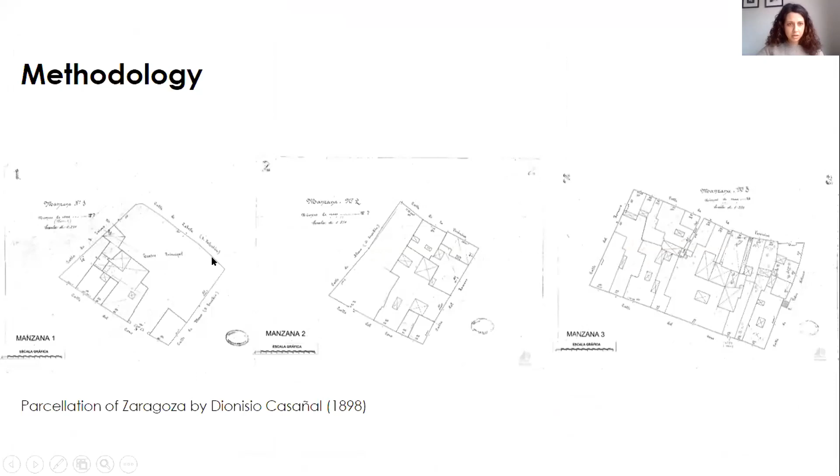So it started by putting the building blocks, and after finishing this area, including the theater, which is on the southern side of Decumanus and the east of Cardo, I placed all of those individual surveys inside of those blocks. In here, I superposed the two surveys, but I don't know why you're not seeing it.

Never mind. So for the analysis, I'm going to talk about the typological process. The term typological process was defined by Caniggia and Maffei to explain the progressive differentiation among building types in the same cultural area. The reason for change in type is progressive variations and adaptations of existing buildings.

The existing building can be a base type, like we have on the left side in this block as a domus, or it can also be a specialized type, such as the ruins of a theater. After losing its significance, it is transformed into a substratum, which is the base for man to transform and adapt it for his living requirements.

While these two examples do not share the same exact formation, they are both acting as the substratum. And here we have a row house as the substratum type.

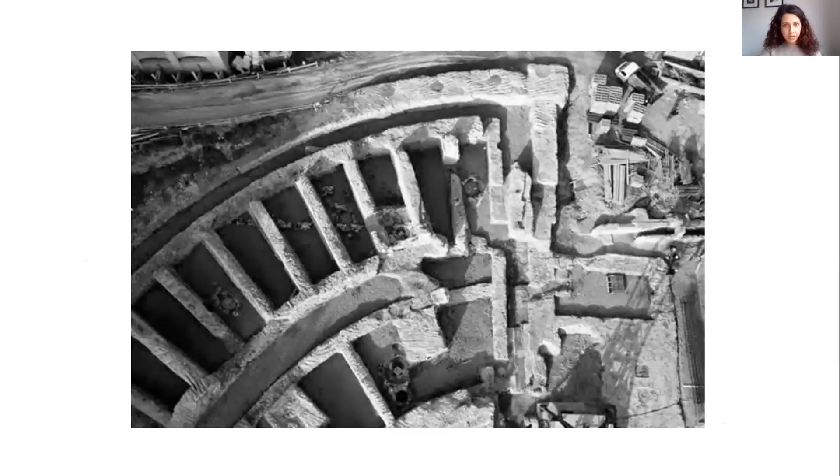Since we know that the theater was actually in this place, I superposed the two surveys to see the change in this block over time. Here you can see the overlapping walls, and the reconstruction plan of the theater done by Miguel Beltran Lloris.

So here, the typological plan shows the difference in types in the same block: patio houses on the left, and row houses aligned with the theater. But the pseudo row houses that indicate the stages of the block take my attention the most, the yellow ones.

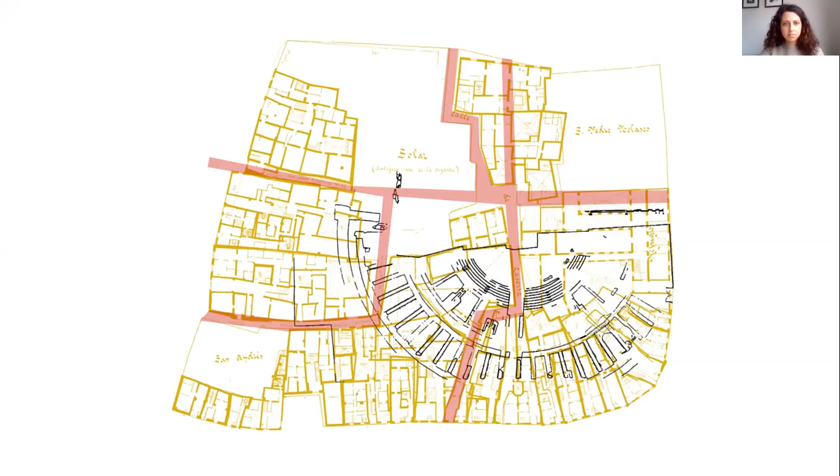First, I prepared the route analysis, then illustrated my thoughts on the formation of the block. Both the pseudo-row houses and the empty area on the left bottom indicate the stages this block has been through over time. So I tried to identify the types to see the measures for the process.

The second type is the row house. They show a wide variety in the block, but they also take shape of the theater and have direct access to their backyards, which is the former orchestra of the theater.

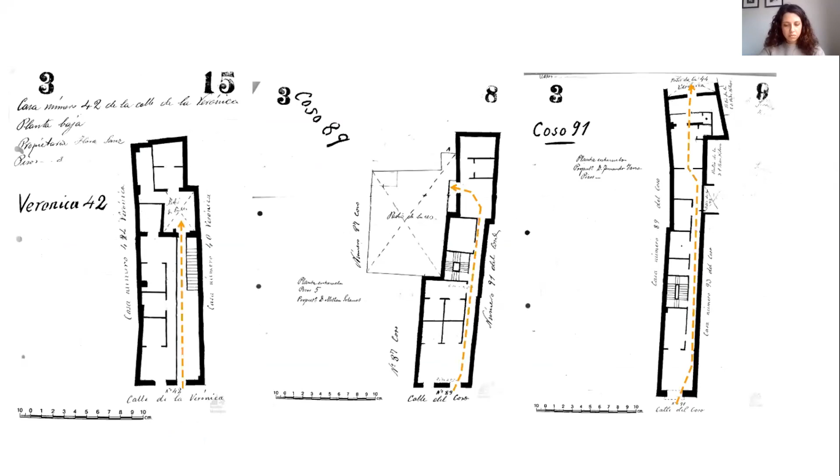And the last type is pseudo-row house. That gives the hint of former roads in the block, and they are usually monocellular in this case.

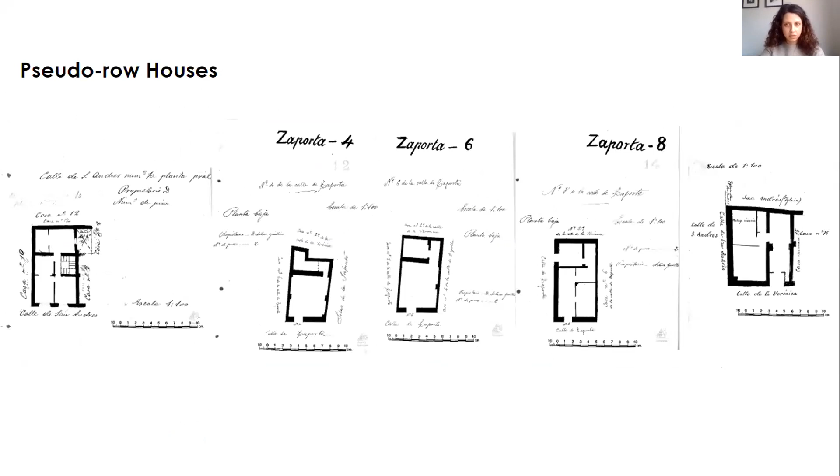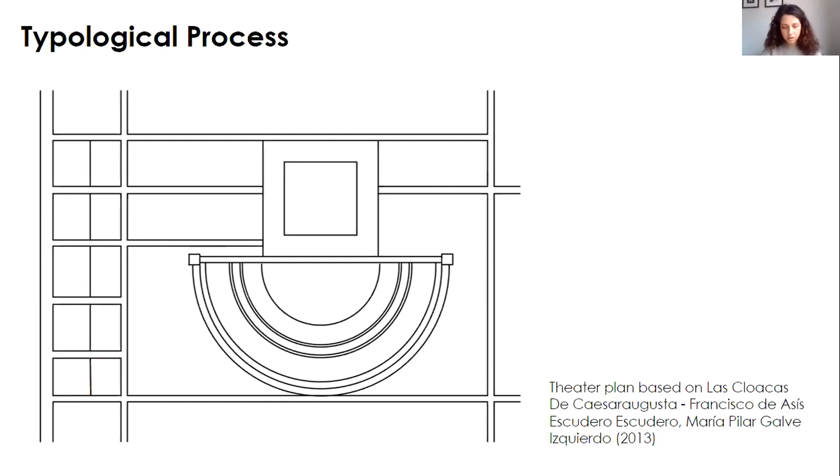So lastly, I prepared the plan of the block in Roman times by using information from other research done on that stage. Most of them were sharing the Cardo, one block away from the theater on the left side, and the domus between these two blocks.

On the next step, I compared it with the plan of Ambroise Tardieu and existing roads. It shows the patio houses take shape on the left side by taking the place of the theater after it turns into ruins. Later, we see the evolution of roads and merging of these two blocks.

The road on the left is directed to the mosque in the north of the city, so this stage might have happened in the Muslim era.

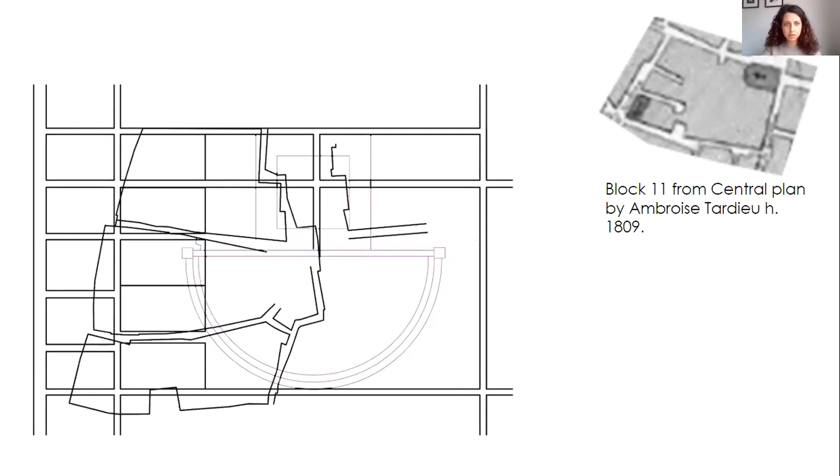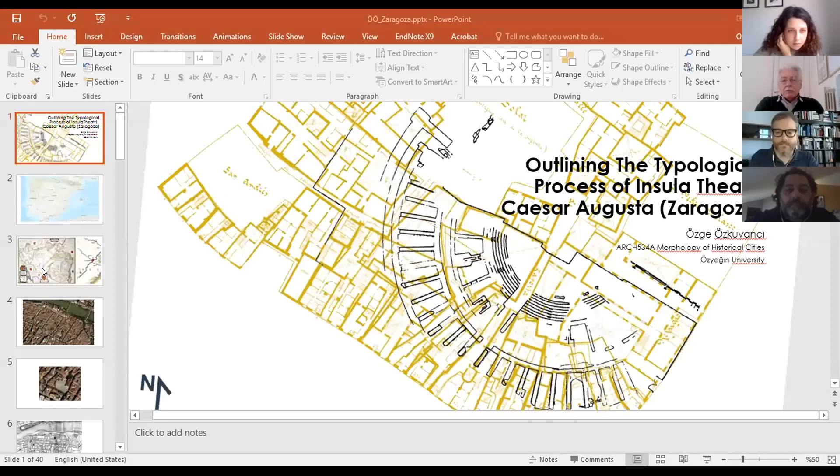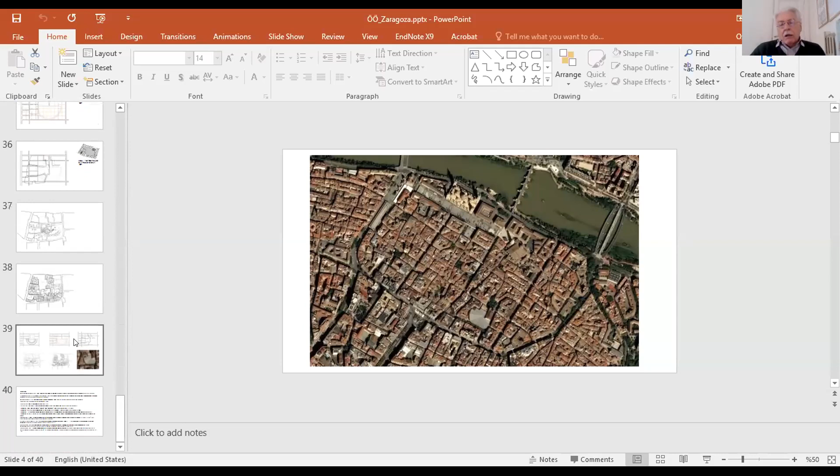In color, it is a final analysis in color that you made at the end, down, down, down, down, down. You have made an analysis with red for the matrix, and light blue for the restructuring. Next one, next slide, next slide. Oh, this one. Okay, go on.

Okay, you see to the right side, you mentioned two. You have noted two restructuring streets. So I was wondering, what are the attractors that made those restructuring streets?

That probably would be outside of the figure, actually. So one of them is for sure the theater on the left, but you have to find out what happens, what is on the other side, what is attracting that route on the other side.

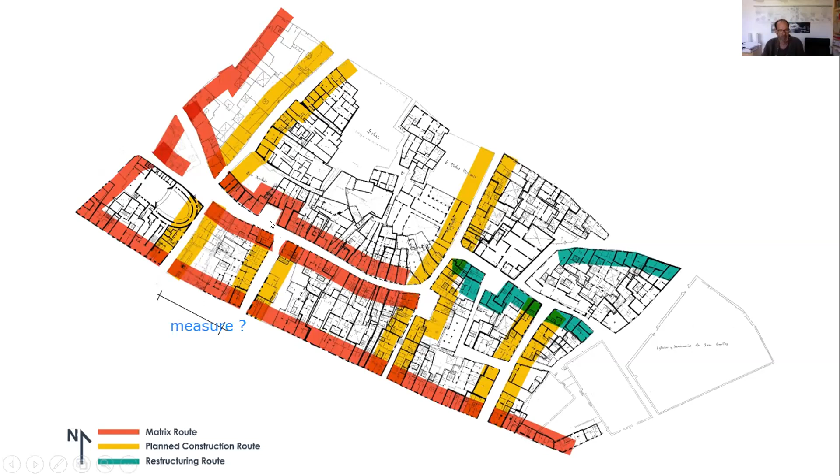Sorry Özge, there was a slide that you showed very briefly showing the terrain, but maybe you want to comment further on that one, one of your slides.

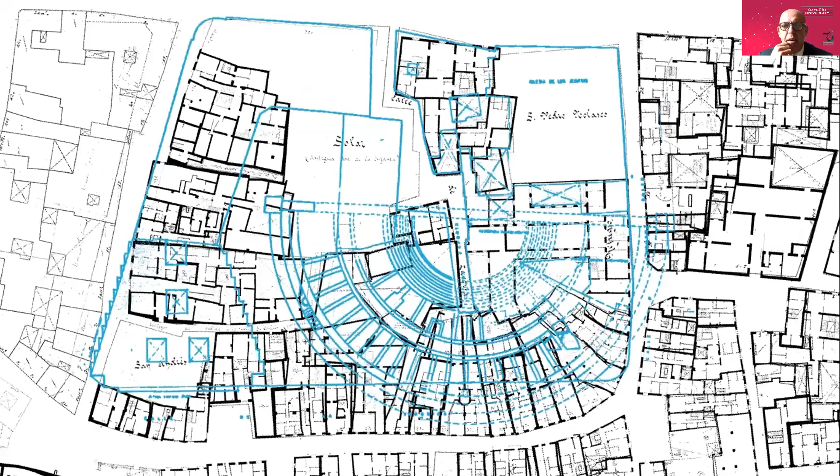I didn't hear the last thing you said, Professor. One of your slides was showing the overlapping of the topography of the terrain with the urban tissue, but you didn't comment. Here, yes, I didn't. Yeah, I can include that information too. Thank you for reminding me, I think I missed this one.

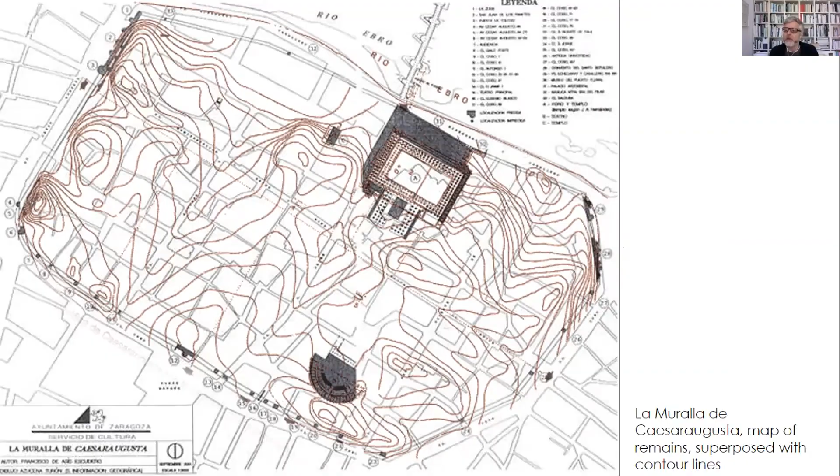Can I ask you another minor thing? What about the actual situation of the neighborhood? Is it abandoned? Is it a livable place? Is it a high-end neighborhood? What about the life in it? Because maybe this could be interesting, just to know how this is working today.

So what's the situation? I have to be in there to answer this question, I think. I mean you haven't been, okay, because during the lockdown this is like a pre-study on this area. I was figuring that this was something that you started before the lockdown. Okay, well I may help you also with this question.

It's a very livable neighborhood. It's not so high end. It used to be, like 30, 40, 50 years ago, a little degraded, but now it's a very nice place to live, and it hasn't fallen into these gentrification processes still. So it's quite a mixture of different people, different economies, and it's a very nice place to live. I live near there, so.

Okay, and what about the usages? Is it residential, commercial, shops? It's mainly residential. It's like the typical city center in Southern Europe, where you can find different shops, small shops, grocery shops, and also there's a commercial street, lots of bars and restaurants as well, but not so many that have expelled the residents. No gentrification, not yet, or well, just maybe a little bit, but not so much. Rents are still affordable, I would say.

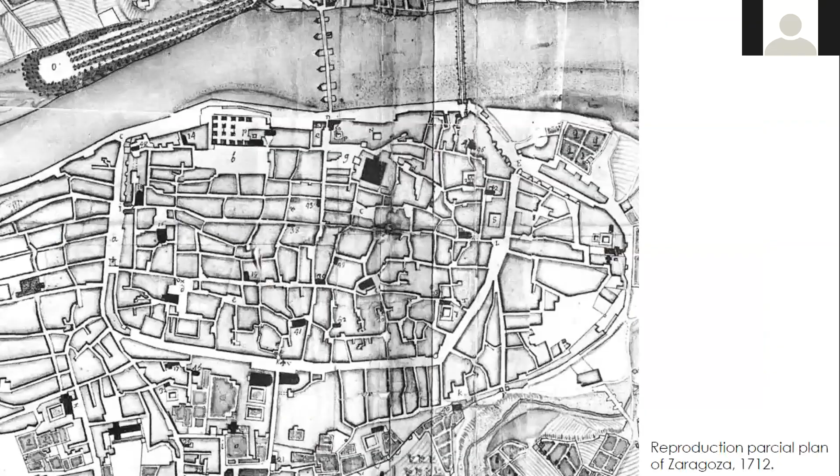And then I also noticed that you have somehow analyzed the prevalent measure of the patio house. There's a slide, can you go back to that slide where you show the measures of the patio houses? No, not this one, not this one, not that. This. So that is interesting, because it should be 17.76 times 35, which is the typical measure of the Roman domus. What is that? It is 60 times 120 feet, Roman feet. So this measure is very much close to that one.

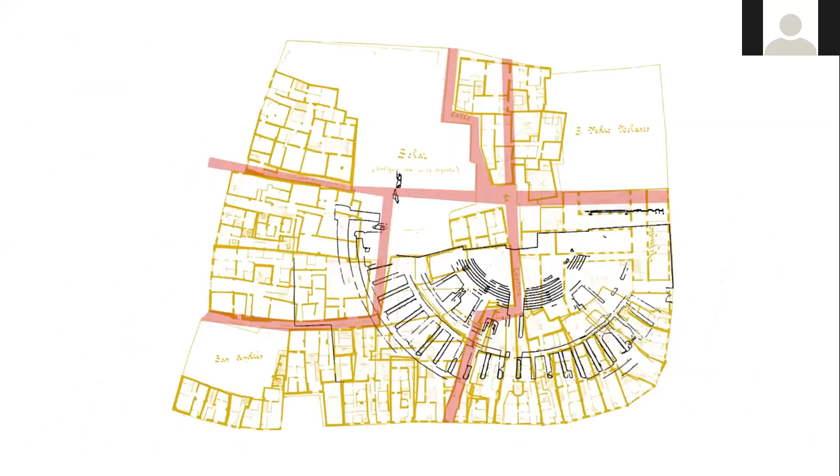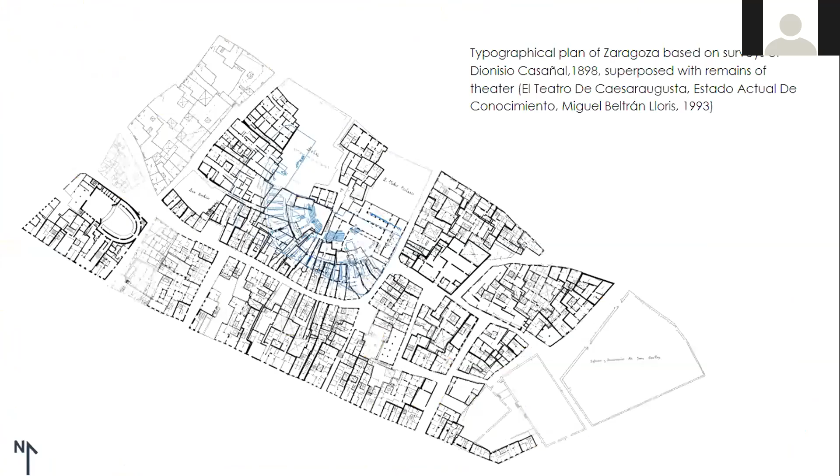And I would look closer into that issue of the measures. And then if we go back to the other slide, with the collage mosaic of the plans. Yes, sorry, no, the one before, the one with the matrix route. Oh, this one could be as well, any plan that, yes, this one. So again, this measure I'm asking, you see here, it seems to me to be 35.50. Is that right? Yeah, almost.

Can you check that measure in your next stage? Because it seems to me that it is 35.50, so that these eventually could have been two domus, 1 and 2. And if this is the case, let me change color to show this. So we have, this is one block, 2 domus. This could have been another block, two blocks with 1 and 2, okay, with 2 domus each. So in this area, you have eventually the persistence of the urban grid, of the Roman urban grid, most probably, not sure, but I'm taking a look at it, and this one also could be another block, 35.50. So 1 block, 2 block, 3, 4, and so on.

So that gives you the hint, and you can attempt a reconstruction of the urban grid starting from the information you gain from this collage you have done here. And that's also very interesting. So also, Professor Petruccioli outlined how these restructuring paths, let me change color here, 1 and 2.

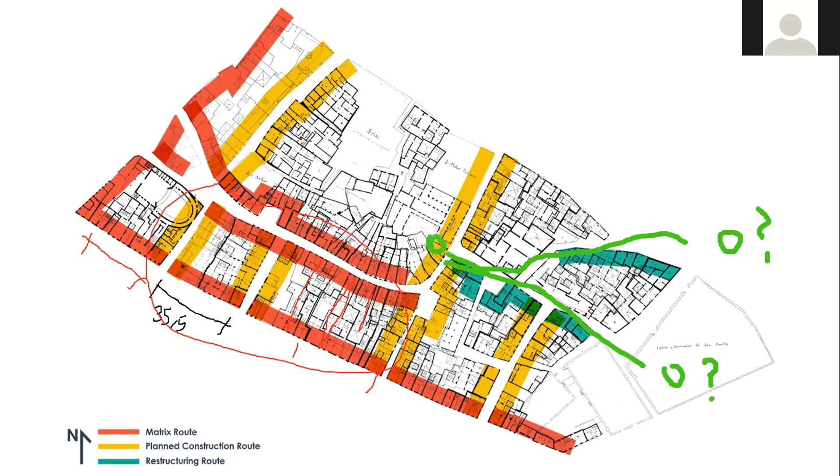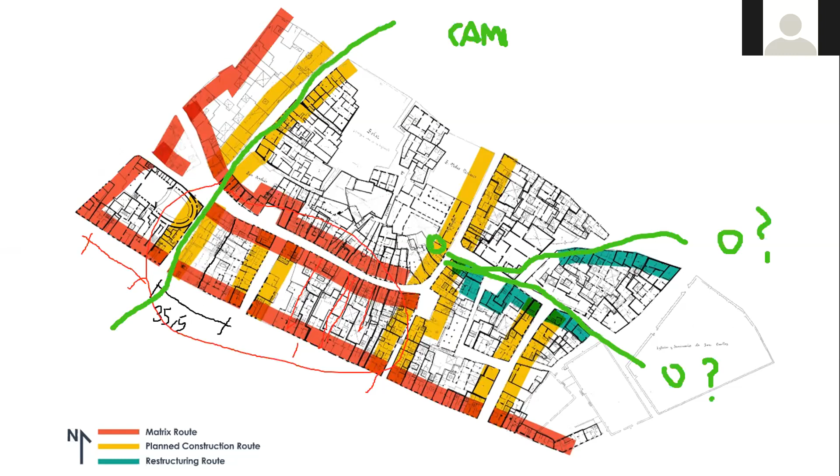That's one of the remarks Petruccioli gave you, which is very interesting. But on the other hand, it seems like this one goes to the mosque, right? Cami, right there, at the end of that path. So again, it seems that the pole determining this other one is not restructuring in terms of the aggregation of these blocks, but in the grid, the urban grid restructuring path. So if that is the one pole, Cami, over there, what was on this other side? That's another interesting question.

And also, even though it's not restructuring in terms of urban tissue, this one looks like another restructuring path. So what was on that other end? In a way, you are looking at the types, the tissues, but also the roads. And how are these roads changing in time? What are the polarities determining those changes? So if you have a Roman phase, you must have an Islamic phase, then a medieval phase, and even a modern phase eventually. That's also something very interesting to look into.

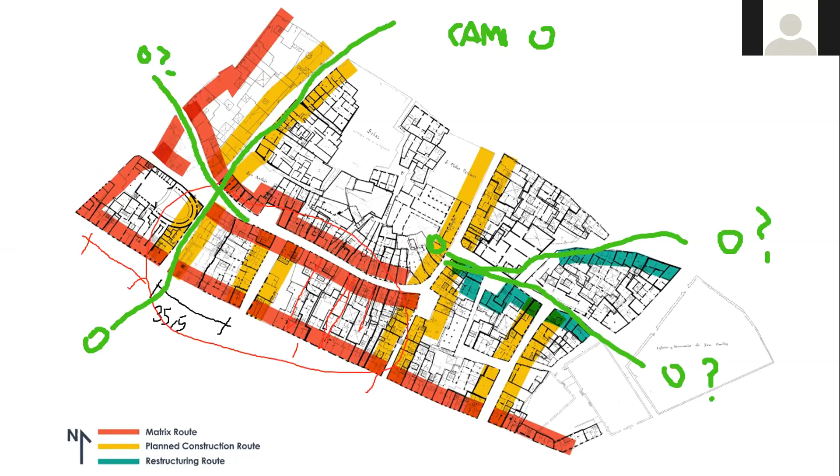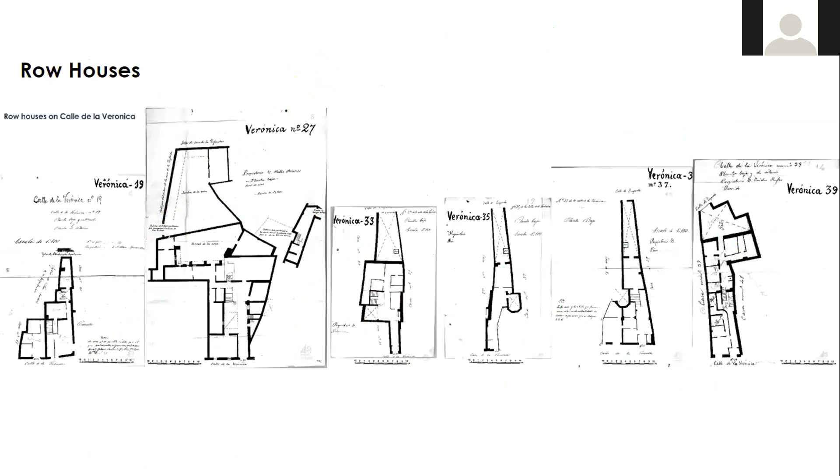I suggest that for the purpose of this paper, you try to draw a matrix of the typological process. Show all those types you've outlined together in a matrix, just like Caniggia did for the row house or the courtyard house. Put them all together and show them with the same measures, but not the individual buildings, the types. It's like a sketch, something like this, but a little more accurate. Show them all together, and try to outline how one moves into the other. Make an attempt at outlining the typological process, which is about how those types change from one to the other.

But congratulations, this is a very good start. I'm very proud of you. Thank you. Thank you.

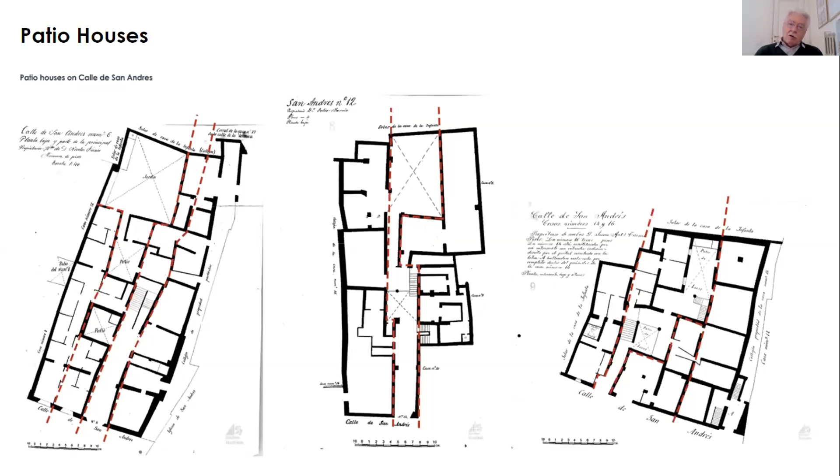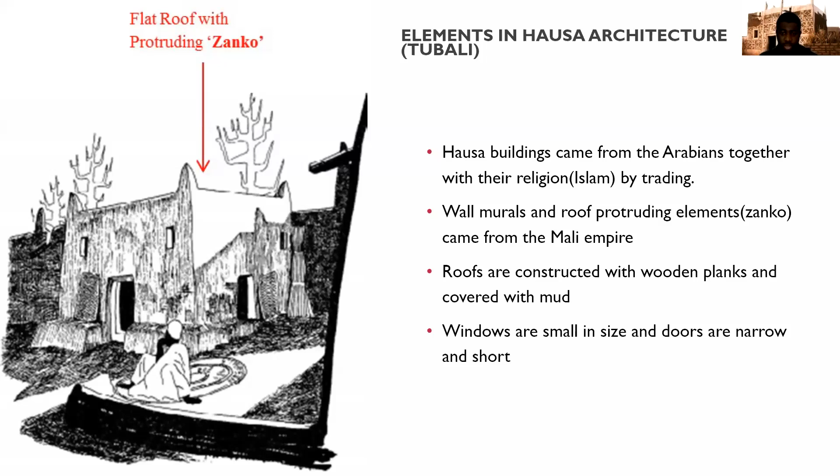I want to talk about the typological process, what makes them, how do they grow from, let's say, a domus house, which is a single house, into a multiple family house, into insulae. So what are the reasons, what are the characteristics these houses go through, the process they go through into developing into a big settlement.

Forms of this type of architecture, the Tubali houses, are mostly courtyard houses, and the courtyards are mostly located in the northeast region of the houses. The houses from domus merge into bigger houses, insulae, the reason being family expansion. The people in this area get married to the people close to them, let's say the surrounding neighbors. So as the houses are developing, they marry into close families. This is definitely the main reason that changes the process of their houses.

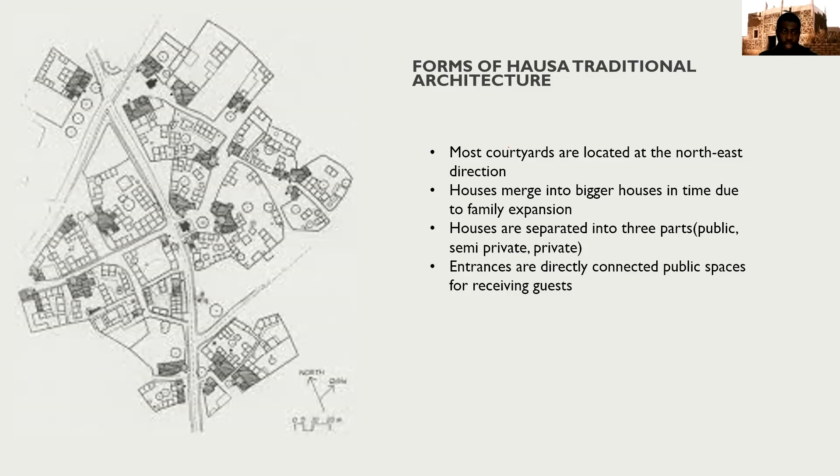I would want to talk about the formation, the type of courtyard house they have. These people's courtyard houses are divided into three main areas. We have the public area, which consists of the entrance and sometimes the places of the male. The male do live in the public or semi-private areas. This is because the culture, the religion, Islam, which was brought to them, makes them segregate between male and female. So the females live in the innermost part of the houses, while the males live in the public and semi-private areas, whereby they accept guests and do their trading.

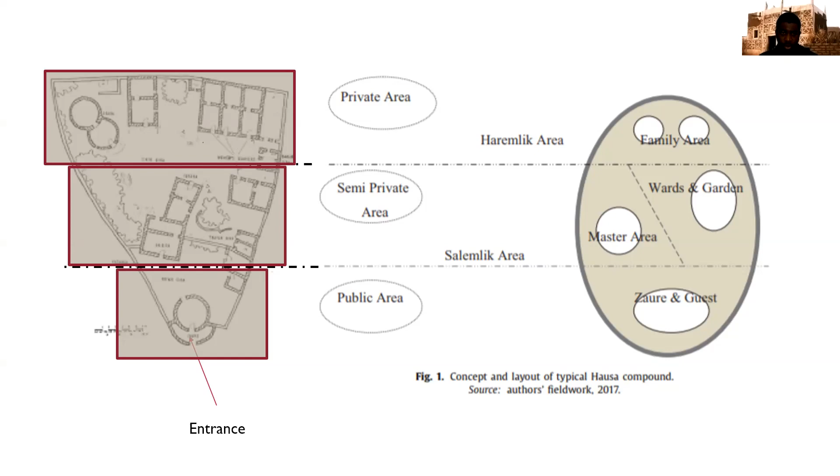This main public space they call Zaure. Zaure is, as you can see here by the right, this is the place where they collect guests, and a public area also. Moving on, that brings us to the main topic of discussion, the typology of these houses, Tubali houses.

From what I said earlier, these houses come together from having two single houses, and they grow into having a multiple family by marrying into another family next to yours, which is usually what they do. From this sketch, we can see two houses where they come together. We have Zaure 1, Zaure 2, Zaure 3. These are the public spaces which then move into more private spaces. Let's say Zaure 1 and 2 here are the public space. Zaure 3 connects both places with the semi-private or semi-public space, and then the inner compound housing the courtyard and the rooms for the wives is the most private space.

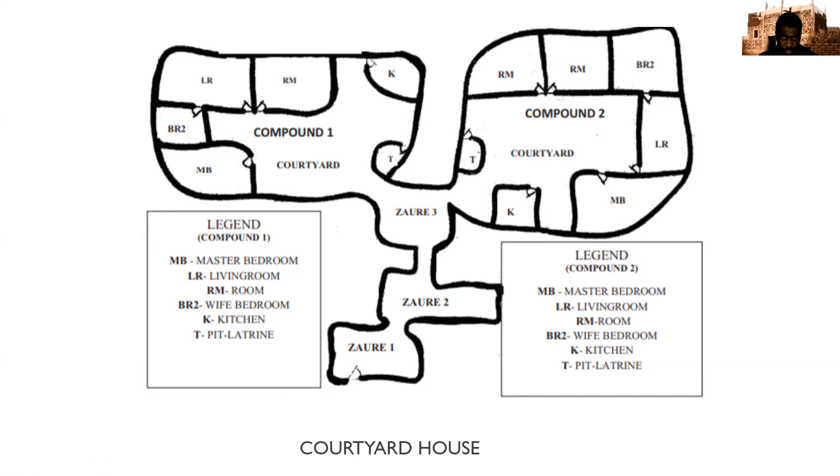So here we have a typical plan of a Hausa house, but what I want us to notice is that this is definitely a house for one family. As you can see, it has just one entrance with the Zaure, then the rooms for the males, and then the main courtyard.

And then we have the female rooms at the innermost parts of the house. But what we can notice in this house, I would say from the hypothesis of this paper, is that this house is actually two houses merged together into one - two domus courtyard houses merged to give us this bigger family house.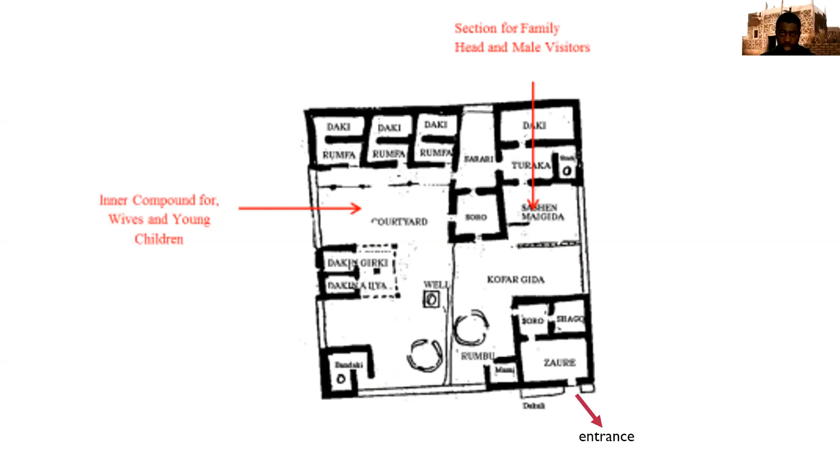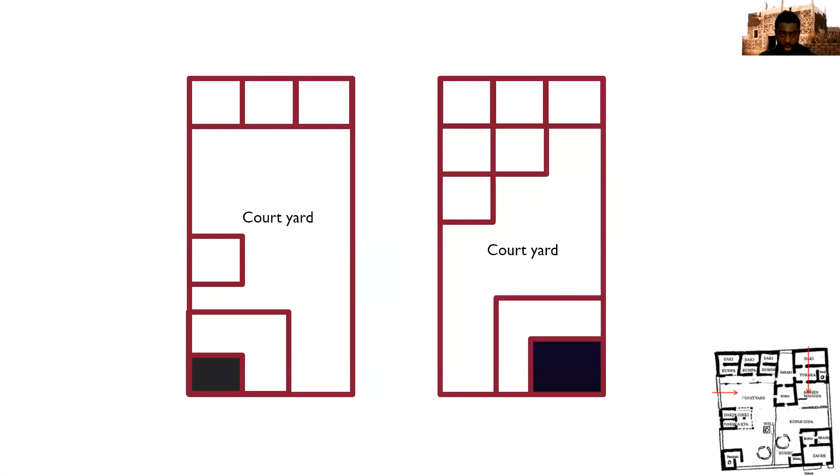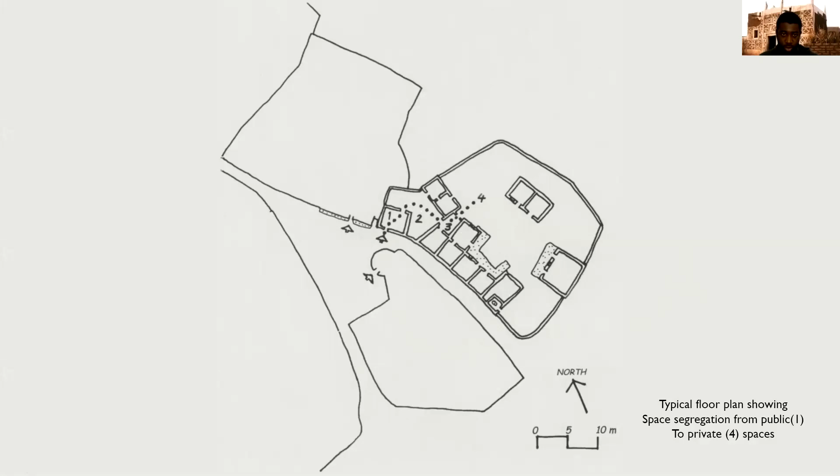So here we can see some houses - some are small houses, some are bigger houses, which definitely over time grew from small houses into bigger houses. So how do we analyze the process where they grew from being a domus house into insula houses? From this we try to analyze the domus houses, the single houses.

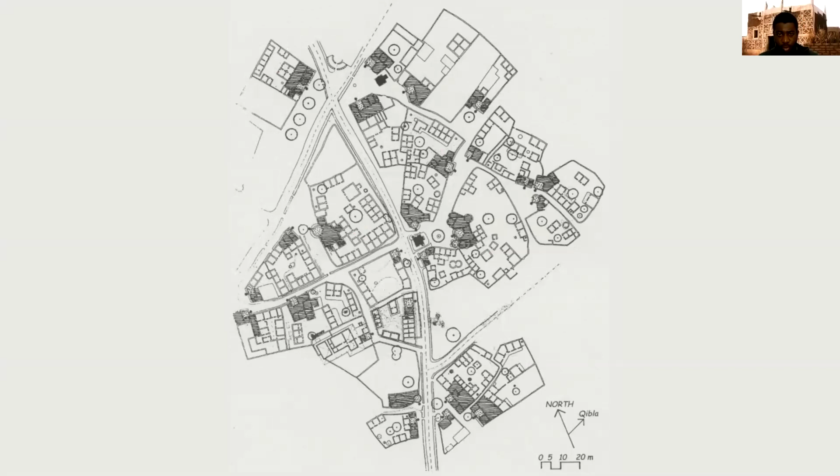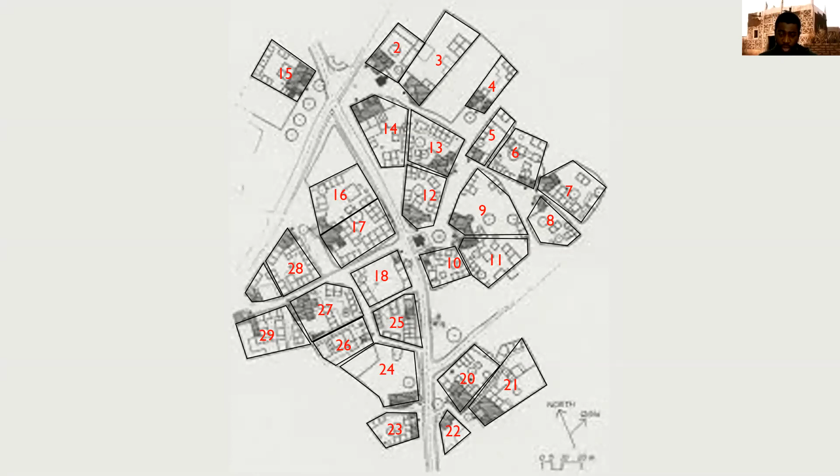So we want to take this for analysis and see what we have. Definitely this applies to the majority of houses that have grown to develop over time. So number 9 and 11, what we have for now is what we have in our analysis. Here by the left, we can see this is just a big compound, number 9 up and number 11 - you can see here it's one multiple house.

But from our analysis, we notice it could be two houses - number 9 giving one house and number 11 another house. So how do these houses come to give us this? Here we can see for number 9, we have its entrance next to the entrance of house 11. So this gives us the formation process.

With time, they merged into one, probably for the reason being maybe marriage, which is mostly the reason why these houses develop into bigger houses to house multiple families, children, and sometimes multiple wives, because their culture allows them to marry up to 4 wives. So this, we can say, is the process of this type of house.

And then we can see the type of houses - the entrance is always to the road, and the innermost part of the house houses the rooms for the wives, while near the entrance you have rooms for the males of the house. So this is the main characteristic of this type of Tubali houses found in the northern part of Nigeria.

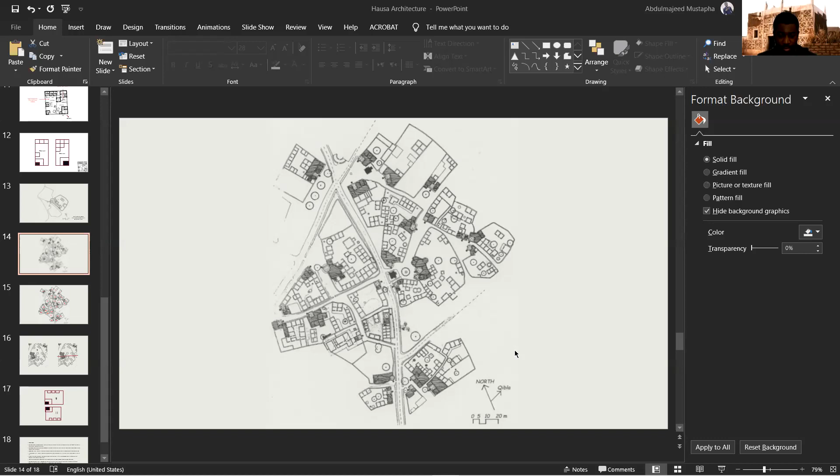I would also like to congratulate Abdulmajeed for his work, which is still ongoing but very promising. I noted three different comments. The first is on the first slide - can you go back to the geographical setting slide? That one is key to understanding this type, because it seems like the region you outlined is a border region.

Is that correct? So it is in between two different cultures, the Hausa and the Fulani, right? Yes. So, okay, that is a border region.

So therefore, we would have two different cultural areas, not only linguistic and religious, but maybe even architectural. I would suggest that you take a look at what kind of typology of houses you have on both those two regions, and then try to find if eventually in this specific type we have elements or connections or similarities with those two different cultures. Because we would expect generally that as they might speak the two languages in that area, bilingual, you might have a house which has connections with those two different cultures. So that would be very interesting to look into.

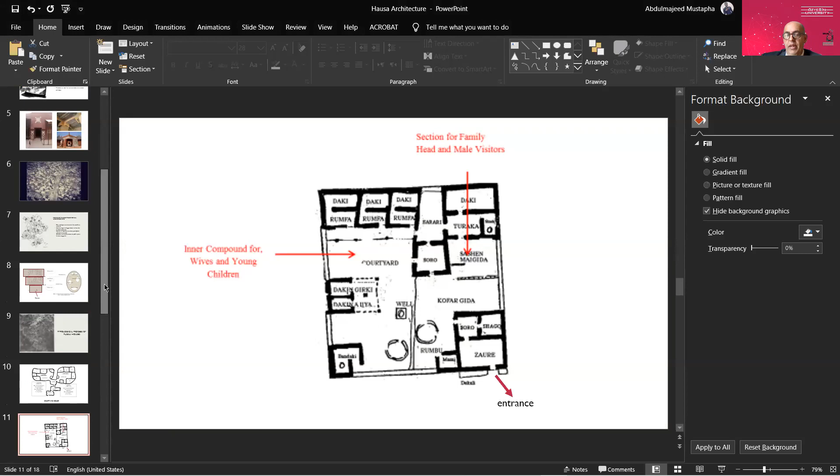I'm sure that's not going to be simple to find out because they're very small. In this one we see the well is there, but on the other one we don't see where they are. So maybe taking a look at this same block with Google Maps, you might be able to spot where fountains are and show them in here.

But on the other hand, in these houses as I see them here, we have four main elements. One is the enclosure, the other ones are the rooms, and then the zaure, the entrance, but also the tree. Yes, the tree is eventually part of the house. And eventually those four different elements could belong to different areas, different cultures, where this is a hybrid house, which is putting together different elements coming from different cultures, namely Islamic, Arabic, or local, whatever. It's quite complex in its form.

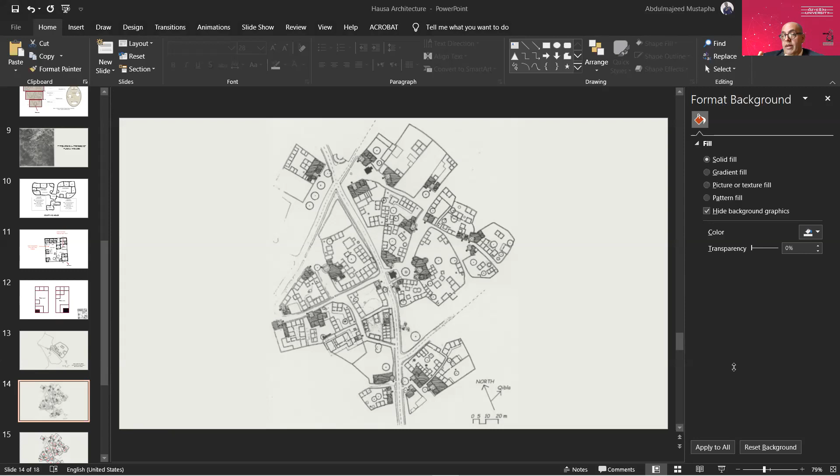It has different elements. It might be the aggregation of two smaller units, that's possible, but it also looks like this drawing is showing this clearly. The zaure is something different from the other rooms. They're different, they belong to different types. And this house is putting together those two elements, the zaure and the other rooms, and the tree, and the enclosure, and the well. So I would try to look into all of these different separate pieces of the house and try to analyze them further.

And how do they then arrange themselves within the enclosure? Whereas on the other hand, you have looked very well into these social divisions of the house, public, semi-private, and so on. That is interesting and good, but I think you have to look a little bit more into those different elements, and don't forget that the enclosure is one element of the house as well. So you've got the enclosure, the tree, the rooms, the zaure, and the well, to find out and map on those drawings that you're showing.

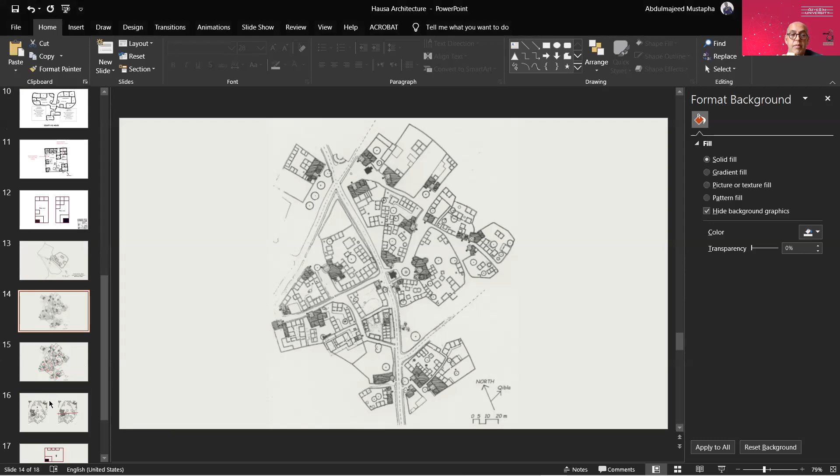So the next slide showing the plans of those two houses that you did should include the tree. Okay, this one should include the tree, but most of all it should include the position of the well, because that is the element you're talking about, right?

Yes. And so again, looking at the urban structure, looking at the aggregation of those houses, looking at the houses themselves, at the elements of the houses, you might be able to build a matrix outlining the typological process of that specific house. Okay, so thank you very much.

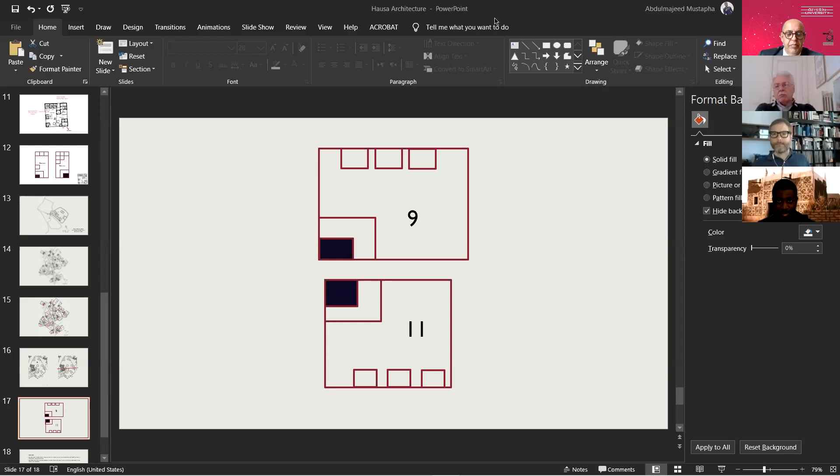Uğur Yağmurdereli graduated in architecture at Istanbul Yeditepe University in 2004 and has been practicing architectural design and conservation since then. Since 2018, studying a Master's in Architecture at Özyeğin University. Main research interests are tourism architecture, historical cities, urban morphology, design as a whole, and theories of architecture.

Hello, good morning. Good morning. It's really nice to meet you here.

I will talk about the changing morphology of Kadıköy, Istanbul today. I will make a quick analysis of the typological and morphological transformation of Kadıköy historical town, also known as the historical marketplace. I will specifically discuss block 23 at the very center of the historical town.

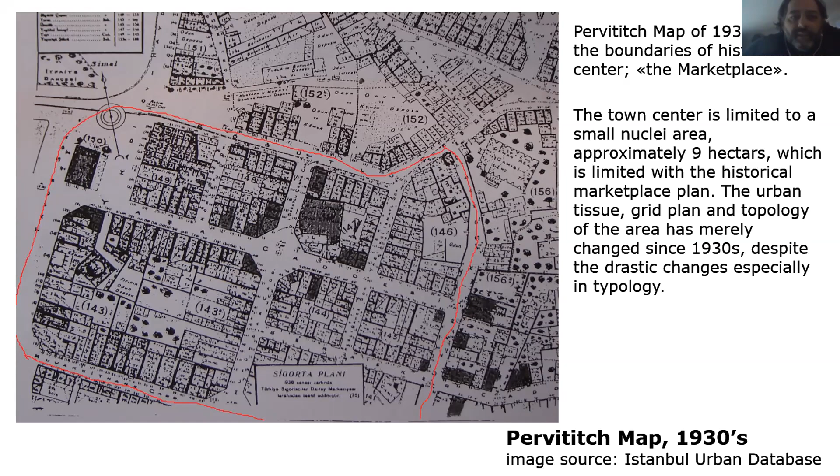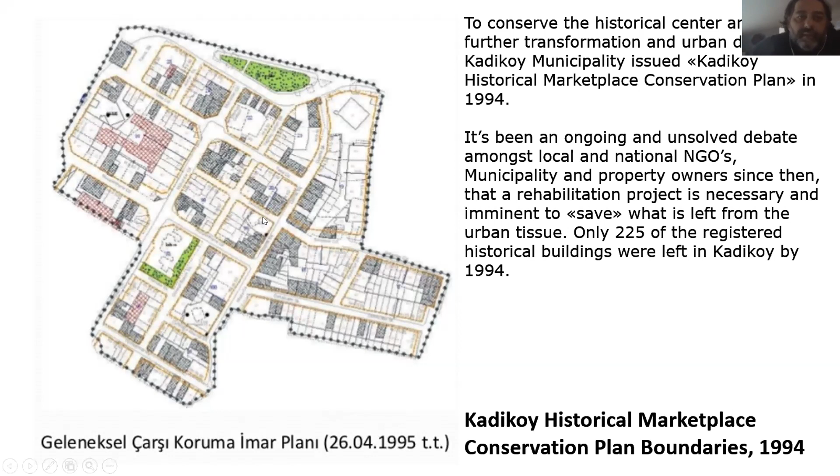Here we see the boundaries of the historical marketplace conservation plan, and the shaded plots show the historical buildings registered on them. And we see here block 23. So there was another plan or attempt in 2005.

It was named the Kadıköy Historical Marketplace Revitalization Project. It was hand in hand with the municipality, a big NGO, and property owners, and co-sponsored by a paint manufacturer. It's said that it aims to make the area an attraction center in the city.

So this was all about repainting some of the buildings, as it says in the announcement, in its bulletin: 'The marketplace is revitalizing and our colors are coming back.' That's all it reads.

So it only caused some kind of gentrification, and due to the huge publicity it caused a rise in rent values and acceleration in transformation.

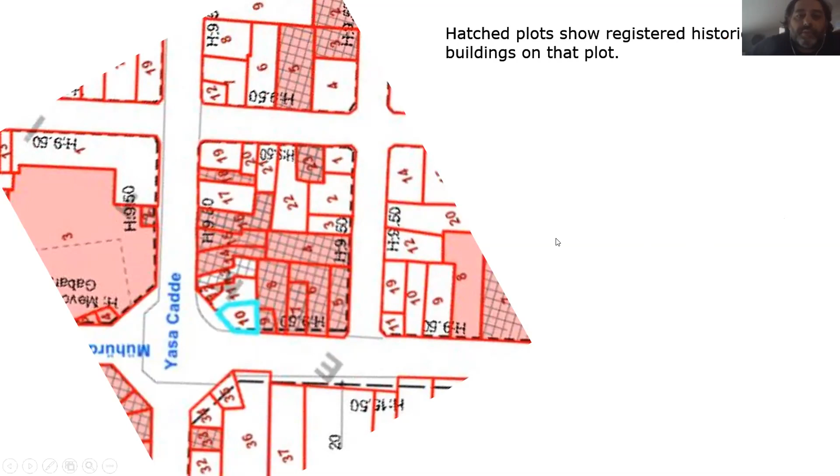The new function is gaining popularity, so that's why the rental fees are high, and it's very hard to find a shop here.

So to create a decent shop or restaurant, especially, you have to aggregate as many buildings as you can. That's some kind of a commercial rule — you try to aggregate as many buildings as you can and go into the courtyard and cover it to create more space.